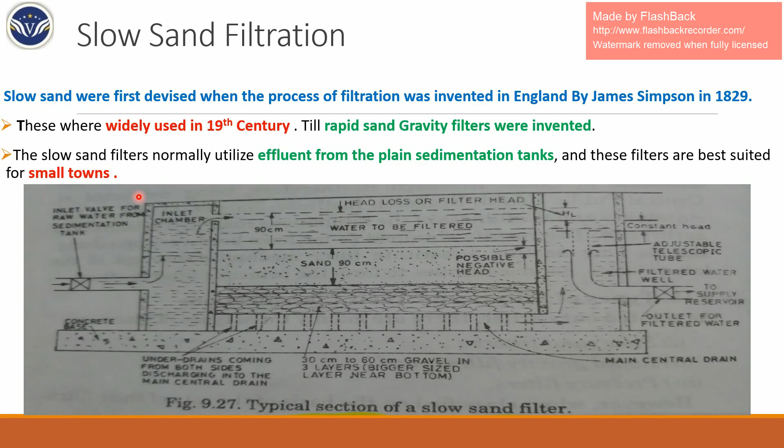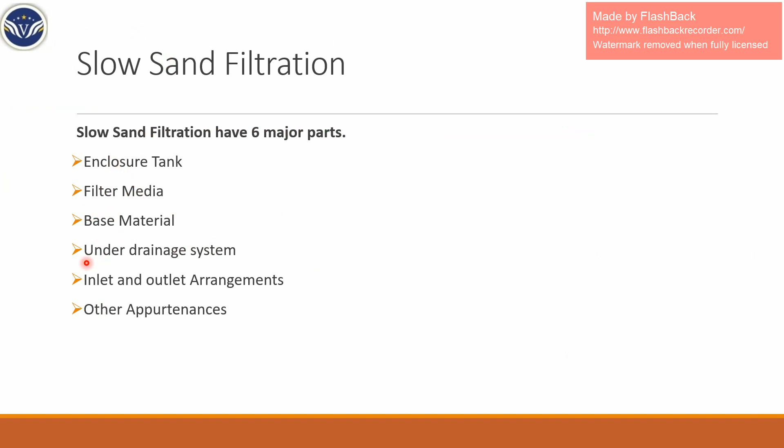So there are six major components of slow sand filter. We will see it one by one. So it's an enclosure tank, filter media, base material, under drain system, inlet and outlet arrangement, and other appurtenances. So we'll see one by one.

So first one is an enclosed tank. It is nothing but a water tight concrete masonry tank. Okay, so the bed slope is around 1 in 100 towards the central drain, and the depth varies from 2.5 to 3.5 meters. The area of this tank is around 100 to 2000 square meters.

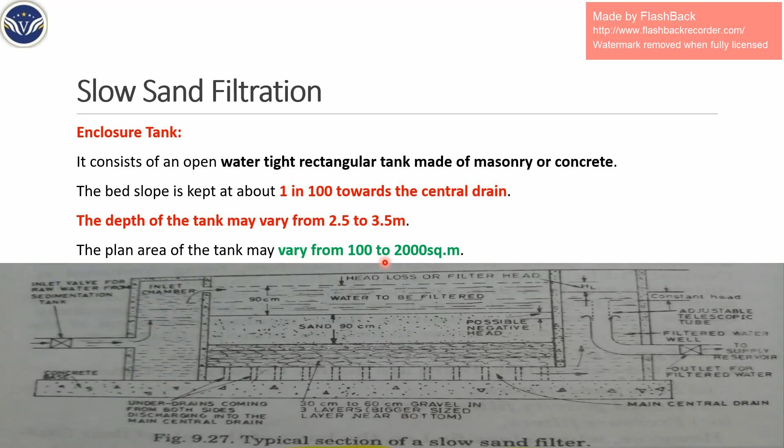The filter media, so filter media is this part. The depth is around 90 to 110 centimeters. It is placed over the gravel, which supports this filter media itself. So the effective size D10 varies from 0.2 to 0.4 mm, and the uniformity coefficient D60 by D10 varies from 1.8 to 2.5 or 3.

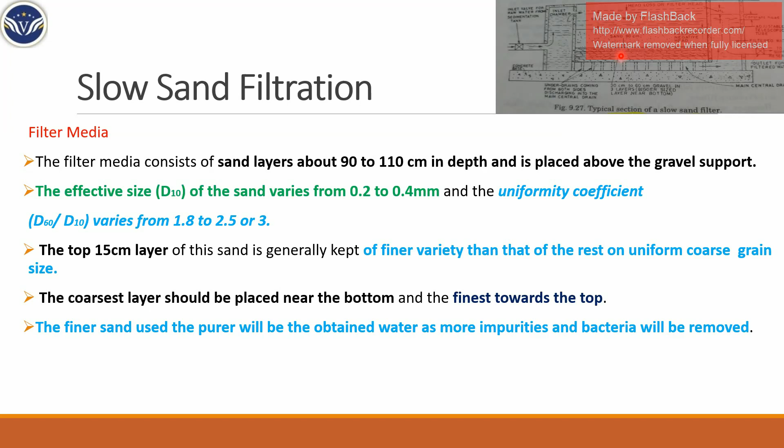And the 15 centimeters of that sand layer is always resting on a uniform coarse grain size. Much of the filtration takes place, or the impurities are removed, at that top layer itself. We have got finer particles at the top, and as we go to the bottom there are coarser particles in layers. Normally we use 3 to 5 layers over here.

So the base material, this is the base material. It consists of gravel, which supports this filter media itself. Its depth is around 30 to 75 centimeters, and the finer size is at the top and the bottom size is always the coarser one, and you can see at the top 15 centimeters in depth.

So size varies from 3 mm to 6 mm. Intermediate layers vary from 6 mm to 20 mm, again from 20 to 40 mm. At the bottom they are of bigger size, this size varies from 40 mm to 65 mm. So depth is around 15 centimeters. So this was about base material.

So under drain system. This is an under drain system. We have got a central drain over here. We have got lateral drains over here, which are porous. Lateral drains always have a slope towards the main drain. The laterals are separated 3 to 5 meters apart. Water is collected into the laterals, then it is discharged to the main.

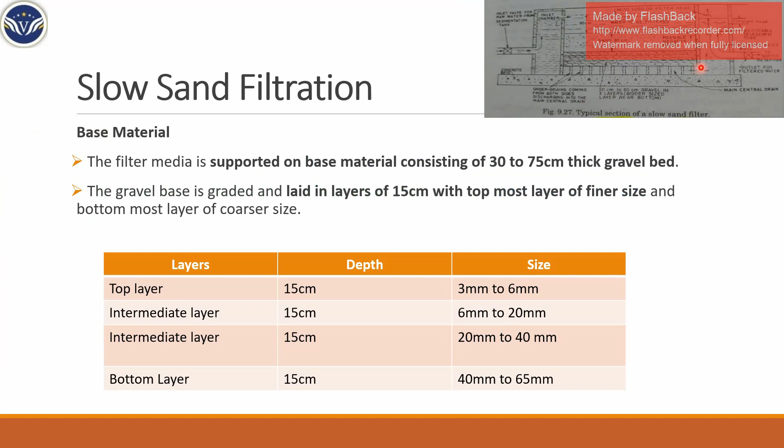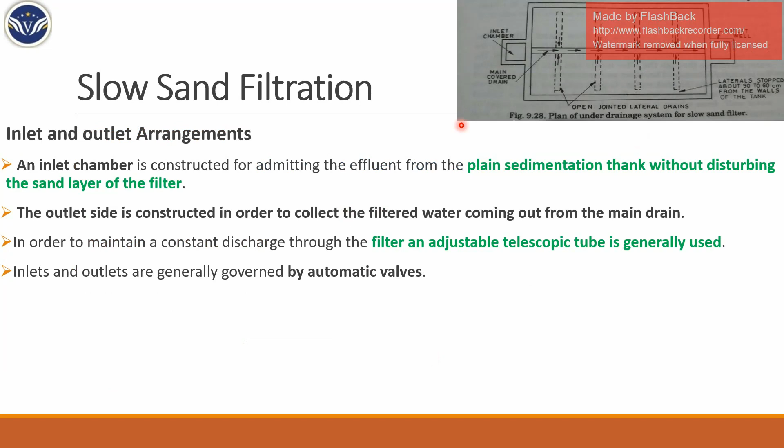And there is an adjustable telescopic tube which is used to control or to have a constant discharge. We can see in this diagram you have got an adjustable telescopic tube over here. And we have got automated valves, which control the discharge of inlet as well as outlet.

Other appurtenances. These are those appurtenances which help slow sand filters to function properly. Sometimes there will be some air bubbles in the filter media. Those have to be removed so that efficient working of the filter takes place. Certain depth controllers are used, which also help in functioning of slow sand filters. Flow meters are used.

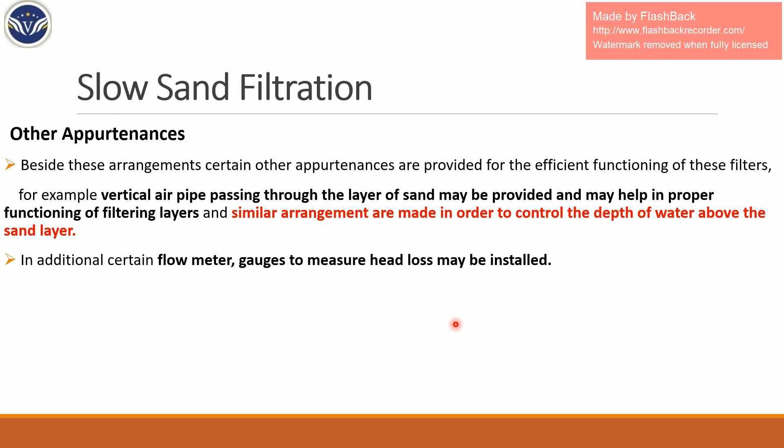Gauge meters are used to measure the head losses. If there is more negative head, it indicates that the filter is not working properly, so you need to go for a cleaning operation. Those indicators should be installed in your slow sand filters, and these are the other appurtenances which help in proper functioning of slow sand filter.

Some key notes about slow sand filter. It kills around 98 to 99% of the bacteria. It removes suspended impurities, and it reduces the turbidity to around 1 NTU.

Again, slow sand filters can remove odor, taste, and color, but they can't kill pathogenic bacteria. It consumes a large space. The rate of filtration is very much slower here. You need to have a certain arrangement in such a way that you stop algae growth. If algae growth is there, your slow sand filter will not work properly, and there should not be any flocculation over here. Floc should not be developed.

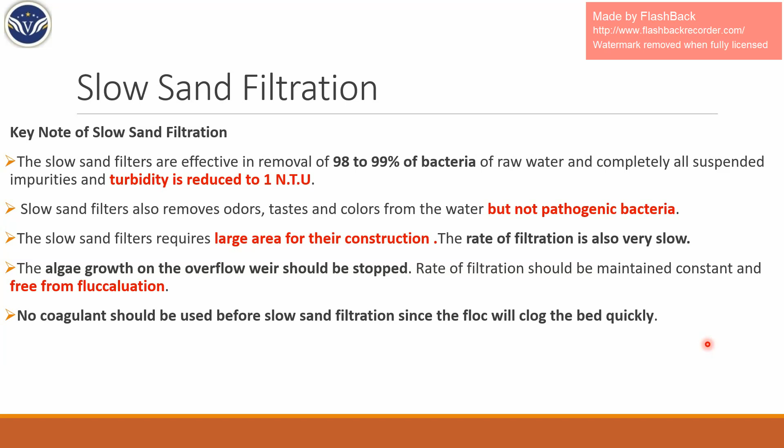And we should never dose a coagulant in a slow sand filter, since it clogs the bed quickly. If it clogs the bed quickly, your filtration rates tend to get reduced. Your filter will not work properly. Next one, operation and cleaning.

Operation and cleaning process of this slow sand filter. So operation is nothing but an inlet. From the inlet the water goes through the filter media. It is distributed uniformly, and water tends to percolate through these sand layers, get purified, and get into the lateral drains, which are supported by the gravel bed. Lateral drains move towards the main drain, from where the water is collected. The pure water is collected from that outlet itself.

For the cleaning operation, as this lateral drain doesn't support any backwash, there is manual cleaning involved in a slow sand filter. It's very tedious. What we need to do is scrape it. You need to remove it layer by layer, 1.5 to 3 centimeters. You need to wash it, clean it with good water, until the depth of the sand reduces to 40 cm or so. Then you need to add more sand.

It is quite laborious, because much labor work is involved: removing that sand, cleaning it, putting back that sand. So it is quite laborious work. But the water quantity used for cleaning is very less compared to that of a rapid sand filter. So this is the cleaning operation.

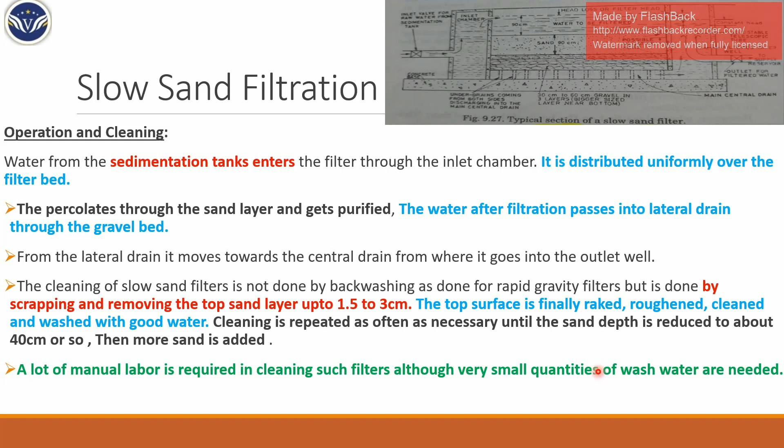Next one, how the filter media should be in a slow sand filter or in a rapid sand filter. Mainly it is made of quartz. It should be free from dirt and other particles. It should be of uniform size. It should be hard and resistant. When we dip it in hydrochloric acid for 24 hours, the weight loss should not be more than 5%. So this is one of the major criteria.

I use the word effective size over there. So what do you mean by that? Effective size of the sand is a measurement and expression. When I say D10, what do I mean? It may be defined as the size of sieve in mm through which 10% of the sample of sand by mass will pass. So D10 means 10%.

I use the word uniformity coefficient there. So what do you mean by uniformity coefficient? Uniformity is the degree of variation in size of particles, measured and expressed. So what do you mean by D60 by D10? It may be defined as the ratio of the sieve size in mm through which 60% of the sample will pass, D60, to the effective size of the sand. That is what we mean by uniformity coefficient.

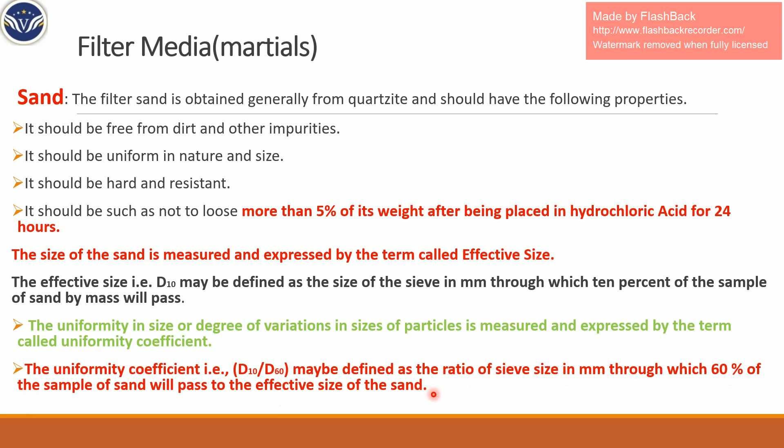Next one, filter medium. Here, the gravel part. Gravel should be hard and durable. It should be free from dirt and impurities, properly rounded, and the density should be around 1600 kg per meter cube.

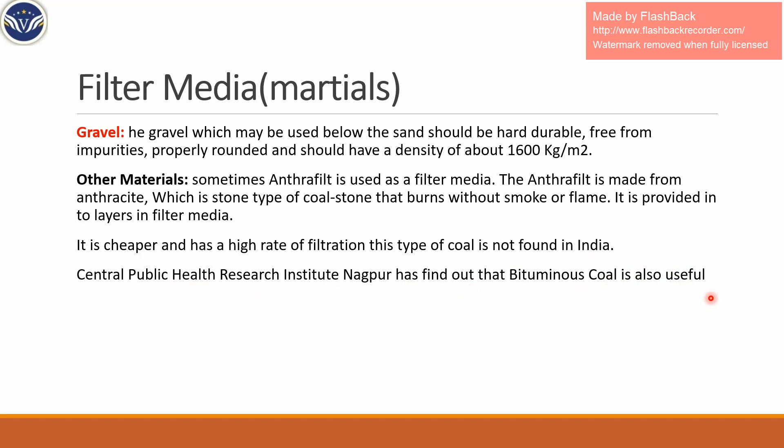Sometimes anthracite is used as a filter media. What is that? It is a coal stone. It doesn't give smoke or flame when it is burnt. It can also be used as a filter media. It is cheap and it has a high rate of filtration. But this type of coal is not found in India. And as per the Central Public Health Research Institute Nagpur, it has been found that bituminous coal can also be used as a filter media. So this was all about slow sand filter.